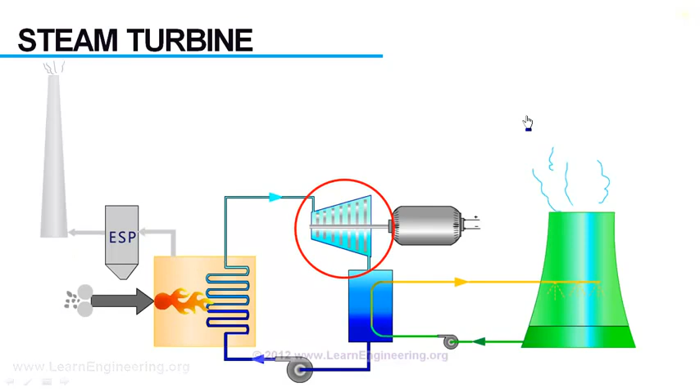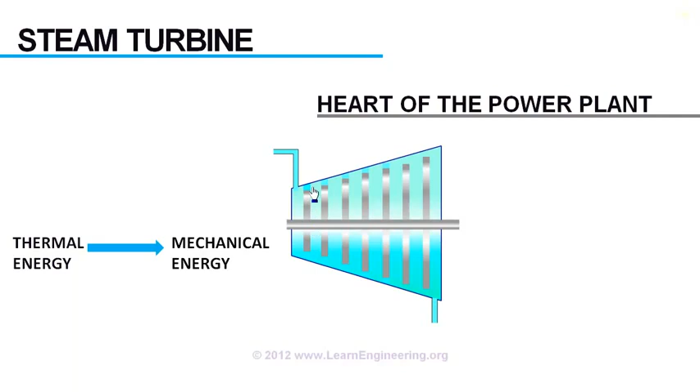In today's video, we will understand the working principle behind a steam turbine. Steam turbines are considered the heart of the power plant, because this is the device which converts thermal energy from fluid to mechanical energy, more precisely as rotational energy of these rotors. So a series of such rotors, which absorb the fluid energy by virtue of its rotation, are the most vital component of a steam turbine.

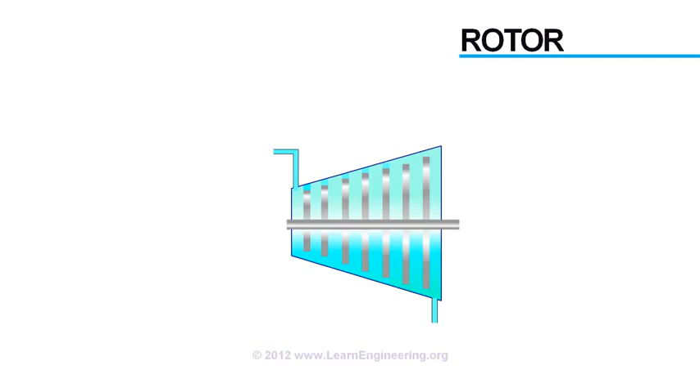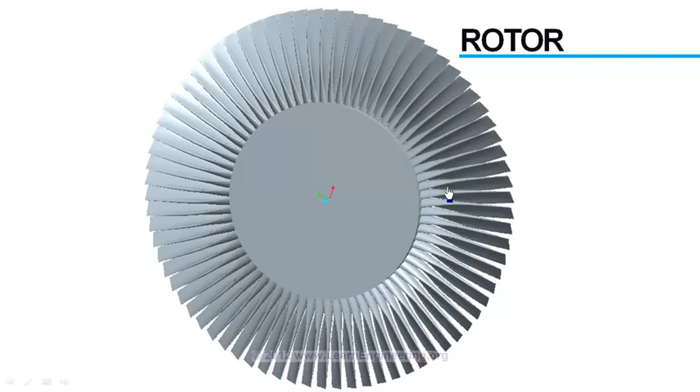Let's have a close look at one of such rotor sets in order to understand more about its working. Here it is. This is one rotor set, and you can see there are a series of blades connected to the hub of the rotor. In different orientations it will look like this, or like this.

If you take a close look at one of such blades, you can observe one thing. This blade is a collection of different airfoil cross-sections set together, airfoil cross-sections which vary in size and shape from bottom to top.

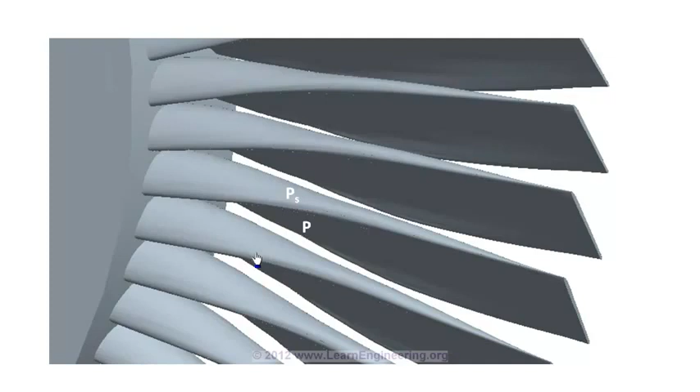When high-energy steam at inlet, with high pressure and temperature, flows over such a blade, it will induce a pressure above and below the blade. And thanks to the special shape of the blade, the pressure above will always be less than the pressure below. So there will be a resultant net force acting in the upward direction. This force will make the blade rotate in this manner.

As the blade rotates, it obviously absorbs some energy from the fluid, so fluid at exit will have lesser energy compared to inlet. In the coming session we will see how we can predict the energy transfer in fluid. But before moving to that, we will have a brief look at the energy associated with a flowing fluid.

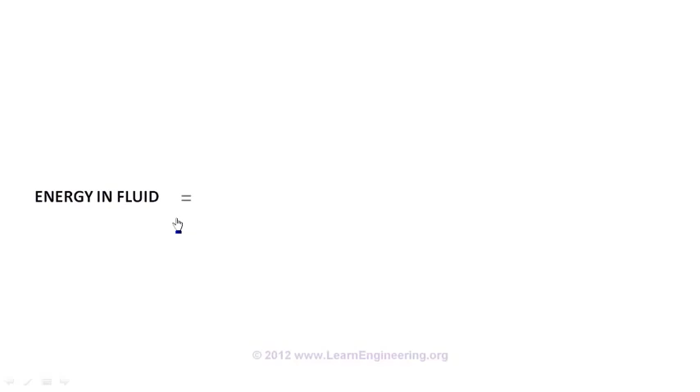There can be three components of energy for a fluid. First, due to its velocity, the kinetic energy part. Second, by virtue of its pressure, the pressure energy. Third component, by virtue of its temperature, the internal energy.

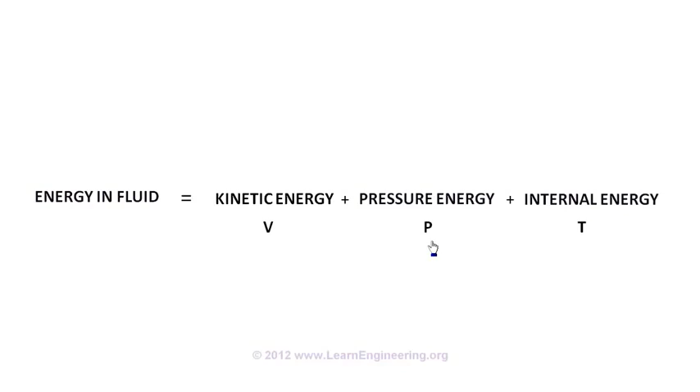The last two components of energy, pressure and internal energy, can be combinedly called enthalpy. If a fluid has a high enthalpy value, it obviously means it has high pressure and temperature.

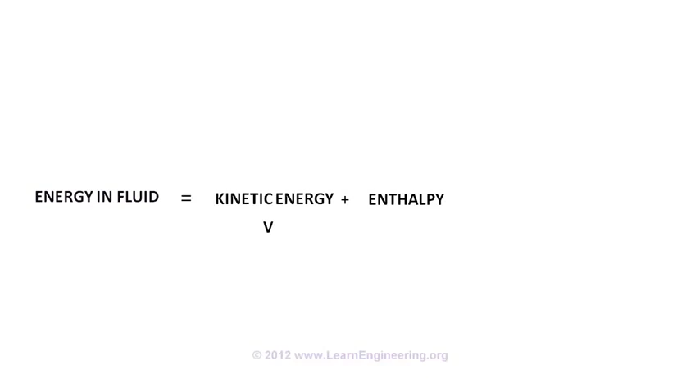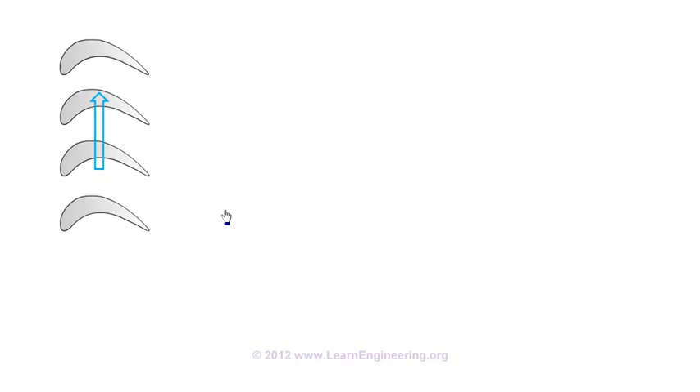Now we will see exactly how a steam turbine absorbs energy from steam. This is the rotor cross-section of the blade at a particular length. As the steam passes over, the blade will rotate in this direction, and this will result in energy loss to the fluid.

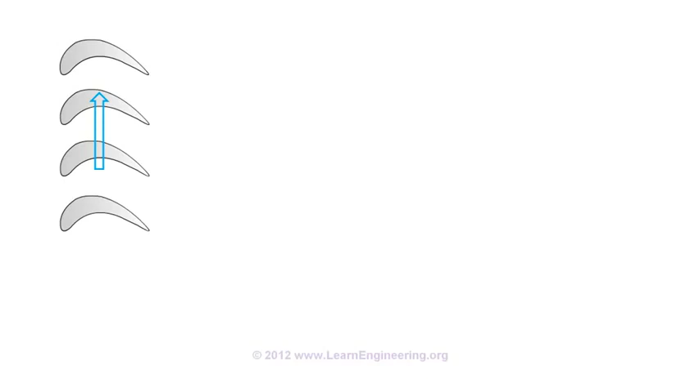For a typical steam turbine, both kinetic energy and enthalpy come down. So if you plot velocity of steam from inlet to outlet, it will look like this. As kinetic energy decreases, velocity decreases. Similarly, enthalpy also decreases, like this.

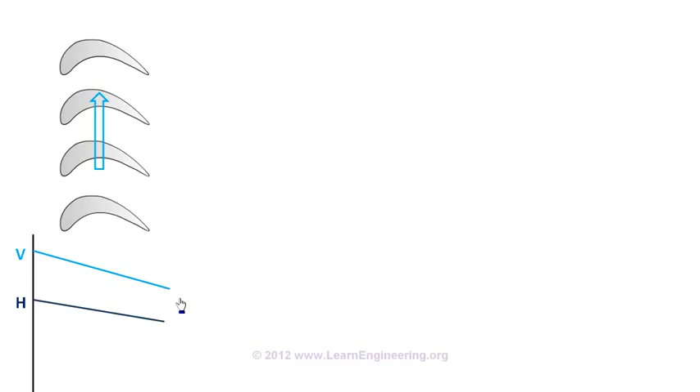Now the next step is to pass this steam to the next stage of rotors. But if you directly pass steam to another set of rotors, it won't absorb much energy, because here the velocity of steam is already very low. So before passing the steam to the next rotor, you should increase the velocity first.

For that, we will use something called a nozzle, a stationary device attached to the casing of the turbine. These are also called stators. Stators are also a set of blades, but these blades are stationary and don't take part in energy transfer. What it does is simply transform energy from one form to another, or more precisely, transform enthalpy energy into kinetic energy.

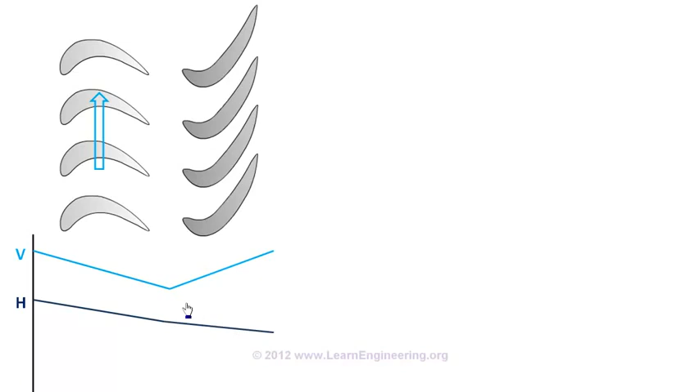You can see the cross-section area of the nozzle decreases with flow, so due to its special shape the velocity increases. But at the same time enthalpy decreases. If you sum the change in enthalpy and kinetic energy, there won't be any change.

Now we have increased the velocity of the fluid, so we can put the next set of rotor. Again stator, and again rotor. So in a steam turbine there will be alternating sets of such rotors and stators. Rotors are moving, attached to the hub. Stators are stationary, attached to the casing of the turbine.

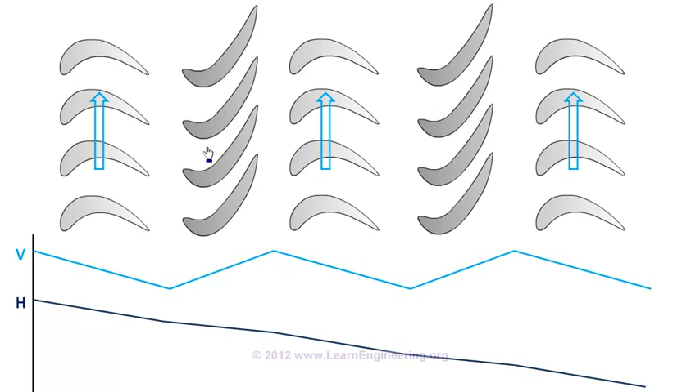Now we will have a close look at energy transfer at the rotor. If you sum the kinetic energy and enthalpy energy change across the rotor, you will get the total energy transferred.

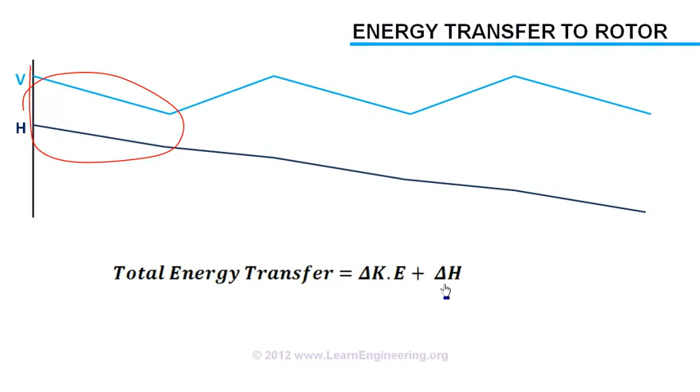What could be the contribution of each of these terms? Is it possible that the enthalpy energy change is zero, yet the kinetic energy part still contributes to the energy transfer, or vice versa? This is defined in a term called degree of reaction, which is defined like this. The value of degree of reaction could vary from 0 to 1.

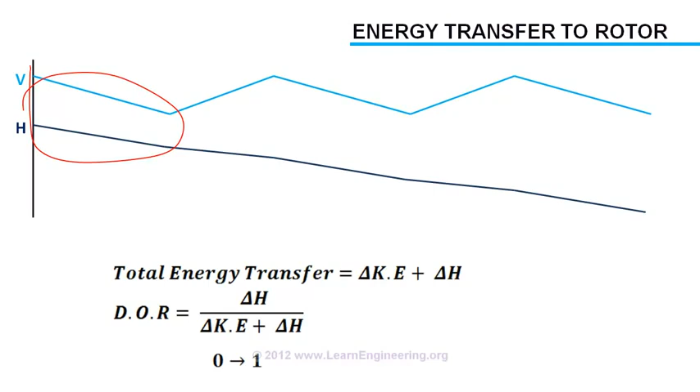Suppose for a turbine the degree of reaction is 0, then such turbines will be known as impulse turbines, or 0% reaction turbines. In such cases, the enthalpy energy change across the rotor will be 0, and energy transfer will be purely due to kinetic energy change.

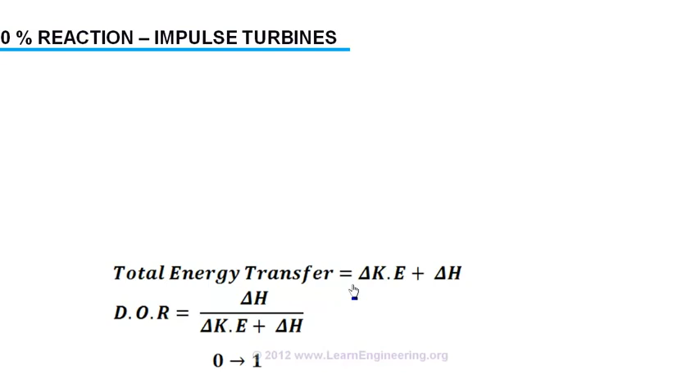Blades of an impulse turbine will look like this. Here fluid actually hits the blade and produces the force, or the force is produced on the blades due to pure impulse action of the steam.

We know along the blade enthalpy doesn't change. Along with enthalpy, temperature will also remain the same, because enthalpy is a direct function of temperature, assuming steam as an ideal gas. There will be a slight drop in pressure, but you can almost assume pressure is the same across the rotor. The only quantity which changes here is the velocity.

Now the other extreme case, the 100% reaction turbines. Here, as you guessed, there won't be any kinetic energy change across the rotor; energy transfer will be purely due to change in enthalpy.

This could be a typical blade profile for such a case. Here fluid passes through the blade without actually hitting it. We know across the blade there is no kinetic energy change, so the absolute value of velocity remains the same across the blade. But pressure, temperature and enthalpy vary across the blade.

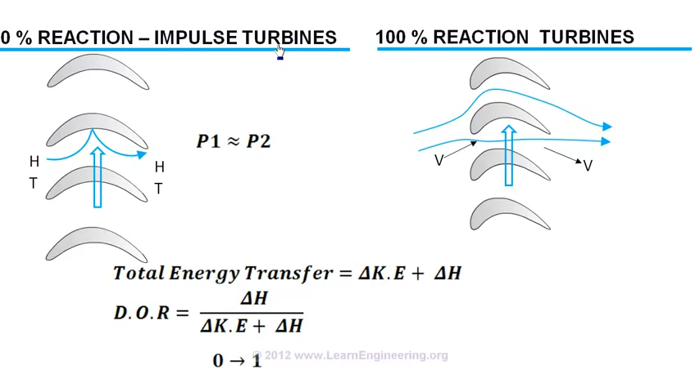A practical steam turbine will be a compromise of these two cases. People usually use the 50% reaction turbine, known as the Parsons turbine. That is all about the working of steam turbines. Thank you for watching the video.